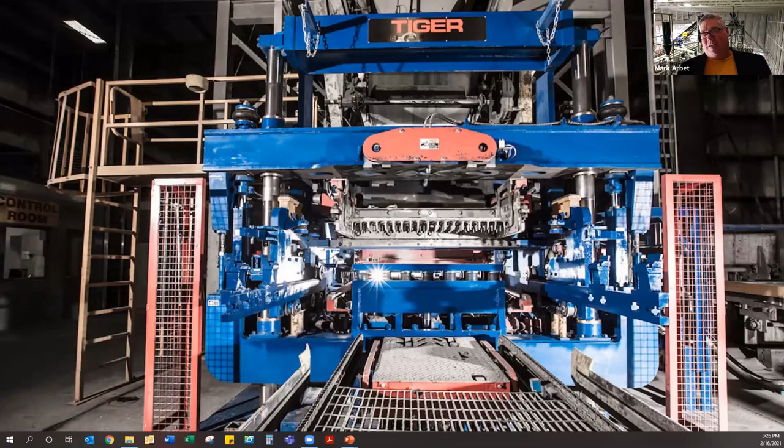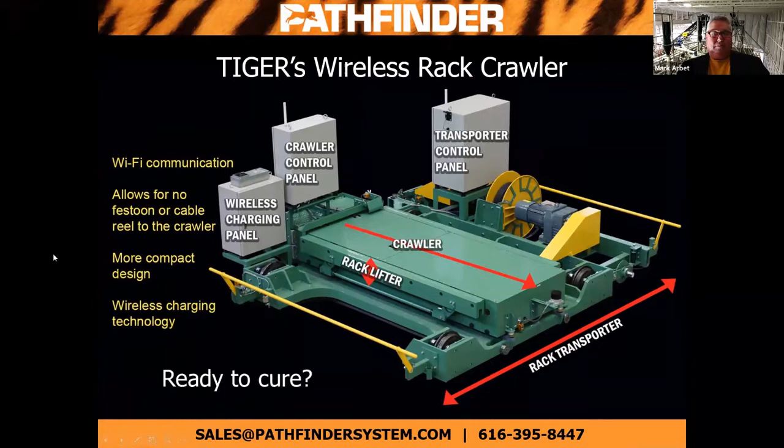Good afternoon, I'm Ron Yubeta with Pathfinder. I'm the West Coast sales rep. I've been hanging around the industry for about 45 years, spent a lot of time in manufacturing and production, so I've got a lot of related experience that everybody has.

Welcome, let's get started, I guess we're going to start curing. What we'd like to see, of course, is you using the wireless rack crawler by Tiger. It's Wi-Fi communication, there are no cables on this car. It's a more compact design with wireless charging technology. So we don't have the headache of getting inside of a kiln and having a wire twist and having to yank all the cable off and drag the car out, that kind of stuff. So it's a neat feature to have.

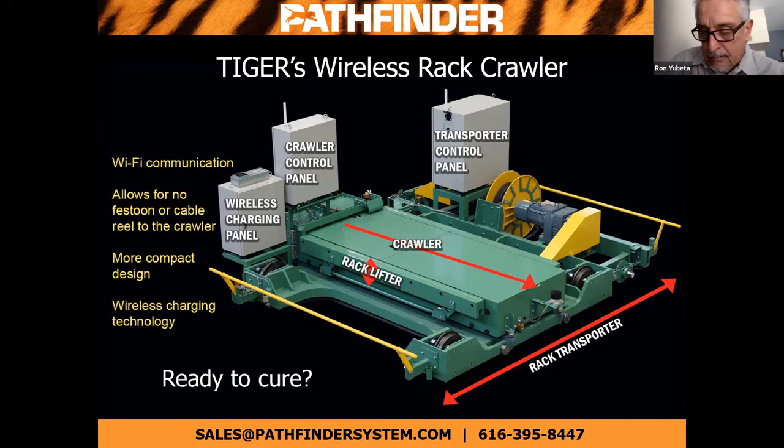A short video of CureTec.

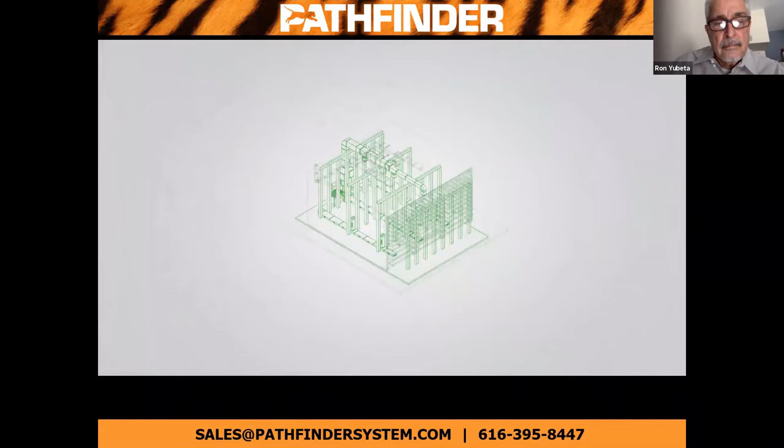CureTec, experts in concrete curing. We supply a wide range of leading technologies for curing that always create the right climate for high-quality concrete products. Quicker and higher early strengths, constant product quality and color, as well as possible cement savings of up to 10% are just some of the advantages. Our practice-proven systems are individualized for your very requirements. Based in Germany, we offer installation and service worldwide. Since 2011, for more than 450 projects. Contact us and optimize your concrete curing with experts. CureTec.

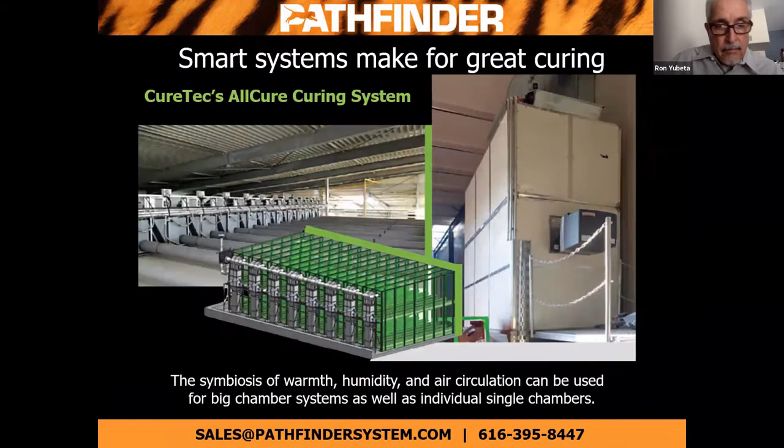The CureTec make an AllCure system, and it's basically something that you have all three kinds of control on. You can get warmth, humidity, and air circulation in different ratios, different speeds. Very important in some products nowadays, since you don't want to bring temperature up too fast, but you want to be able to cure and turn it around in 12 to 16 hours. And if you have the luxury of a 24-hour cure, it adjusts for that as well. It's quite an extraordinary kind of self-learning system.

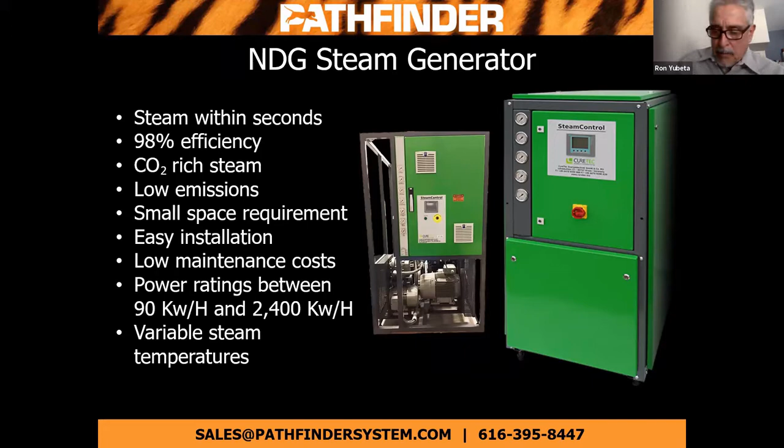The AggTherm heating system, a wonderful system. Of course, if you're in a cold climate, you have a tendency to have your aggregates freeze up over the wintertime in your bins. Something that you can appreciate is being able to turn on the batching and mixing and go right back to work to meet your customers' needs. Sometimes you're not shut down for the cold weather, you're shut down because your bins are frozen over. But it stabilizes a lot of the product, stabilizes what you have to have for your mix cycle.

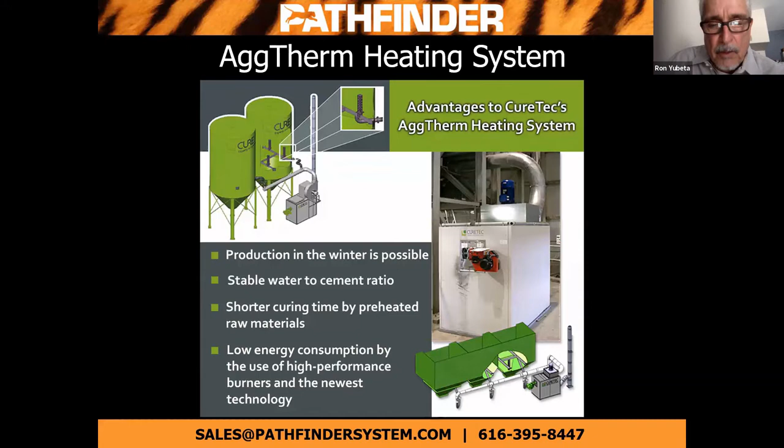And it's a low energy unit, it doesn't use a whole lot. All it basically does is keep the aggregate moving. It'll thaw out a frozen bin of gravel or sand almost immediately. It's a pretty quick system. We can also offer with the AggTherm a separate boiler package, just enough to give you heated water for your mixing cycles. So keep that in mind. That's also a nice feature in the colder climates.

So when you determine your best curing system for you, we have a test chamber that's available for rent. With the test chamber by CureTec, Pathfinder can send this to your site. We can then help you determine which is going to be the best cure method and best cure cycles.

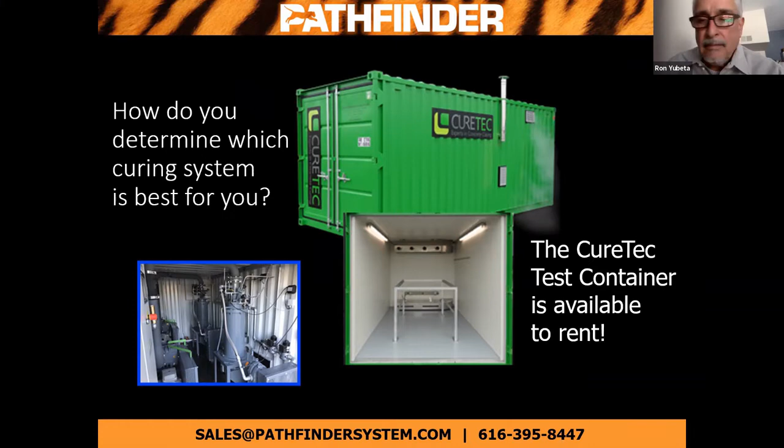Thanks, Ron. Couple quick questions for you. We recognize that a lot of customers realize they might need to upgrade their system. What kind of time frame will they need in order to do that?

Improvements come in a lot of forms, but most are about efficiency with the cure cycle and cure chamber. Amounts of steam, air circulation, and chamber conditions have to be addressed. Planning your downtime can be answered with a good plan. We're good at doing this, so it's best to let us help. We'll sit down with you and evaluate your current curing and chamber conditions.

Some people experience with other curing systems water on their floor. How can we eliminate that?

Water, of course, comes from the condensate that's always in the cure cycle. It's just maintaining better control of how much preset, how much steam, and how much heat, and what works best with your ambient conditions around your plant. If you're getting a lot of moisture running off walls, ceiling, pallets and racks, we're introducing too much too soon. It's a matter of adjusting that, and with the help of CureTec engineering, we can get really tight and close on doing something like that and get rid of that water. Water is very damaging, as we all know, and it's something we are determined to help you fix.